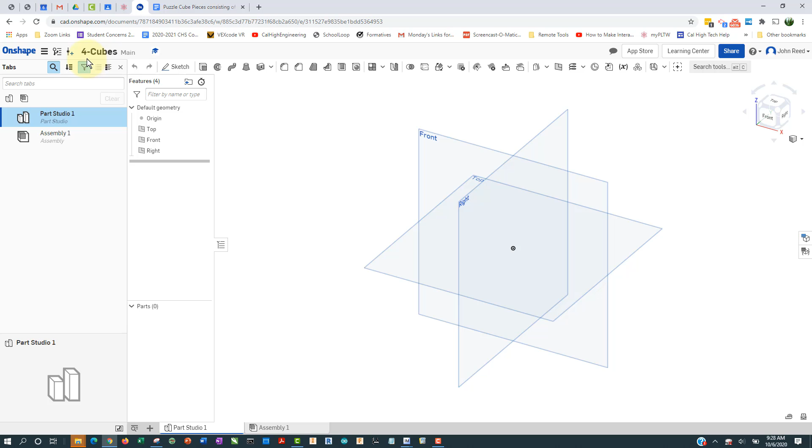Let's make sure that the workspace units are millimeters, and they are. Okay, good. Place a sketch on the front plane, and I can right click, view normal to sketch plane. That's the same thing as hitting the N key on the keyboard. So I'm going to grab the rectangle tool.

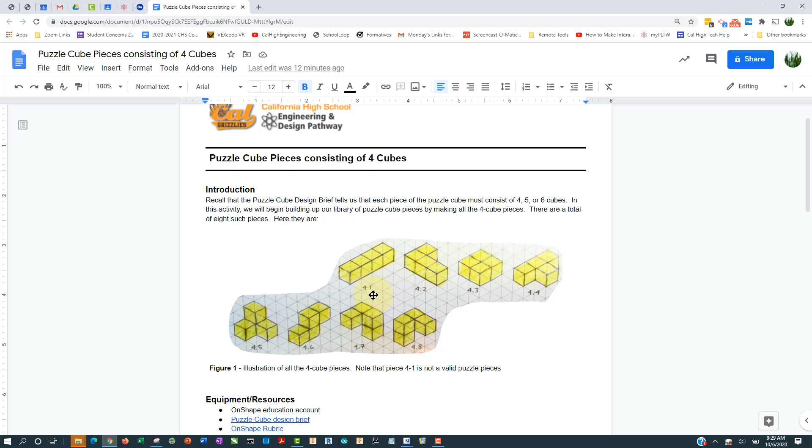But first let's take a look at what we're going to make, and it's going to be this 4-1. This is not a valid puzzle piece. In spite of that, let's just make all 8 of these. There are only a total of 8 pieces that have 4 cubes, so let's go ahead and make 4-1.

So I'm going to come here and click up here and dimension it as I go. 25 millimeters there, 25 millimeters there.

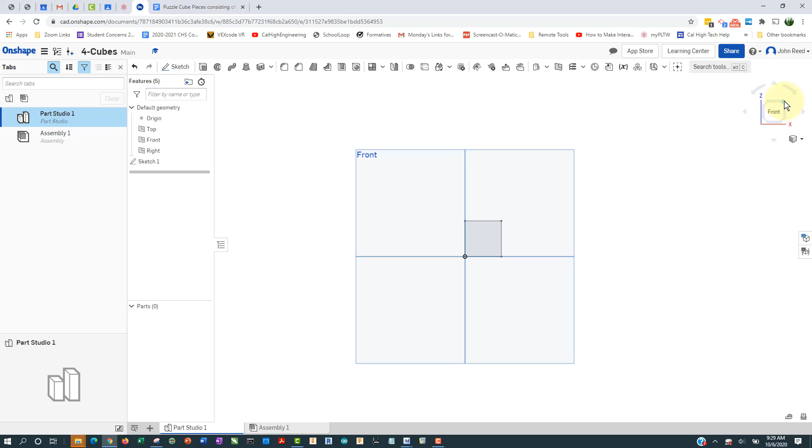I can finish the sketch, and I can hit Shift 7 or click this little corner up here of the cube, or I can just hold down the right mouse button and turn it a little bit so I can kind of see the third dimension before I extrude.

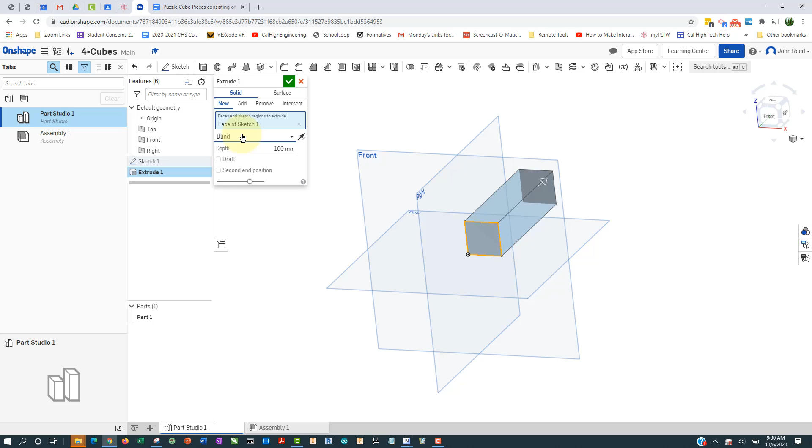And I extrude there. I'm going to go into the screen, and it's going to be a new part here. So it says blind, and the depth of that's going to be 4 times 25. So I can do math in OnShape. Symmetric up to next, yeah. So I guess the term is blind for when it just keeps going until I tell it to go to this depth. So there we have it.

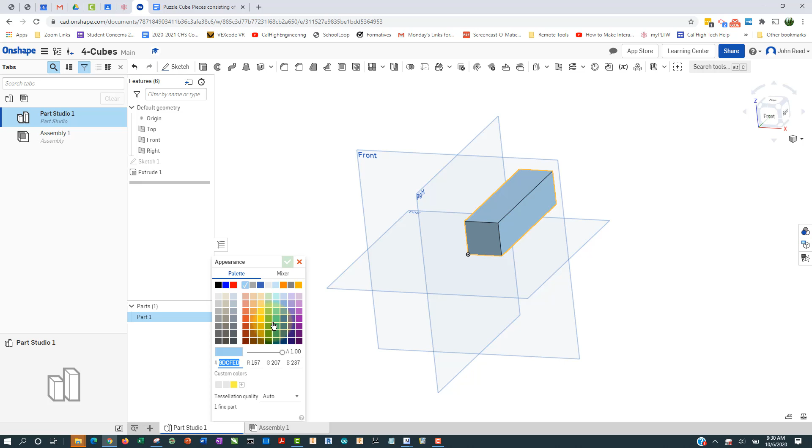So that's my part, and I'm going to make it a certain color. To do that, I can grab it like this, right click, edit appearance. Let's make it yellow. There we have it, and I can turn off the origin planes and then look at it in an isometric view, and there it is.

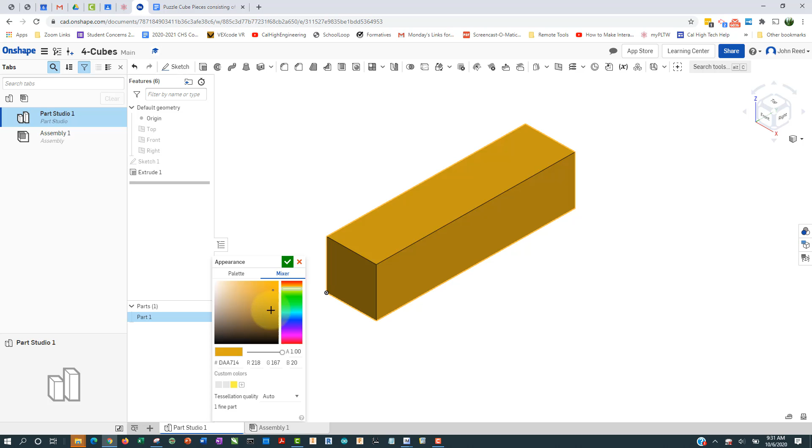Let's actually make this a little more yellow. That's tan. Edit appearance. I wanted to make it similar to what is on the paper, and I guess there's no easy yellow in there. Usually there's one up here. Oh, whatever, I'll just leave it this color.

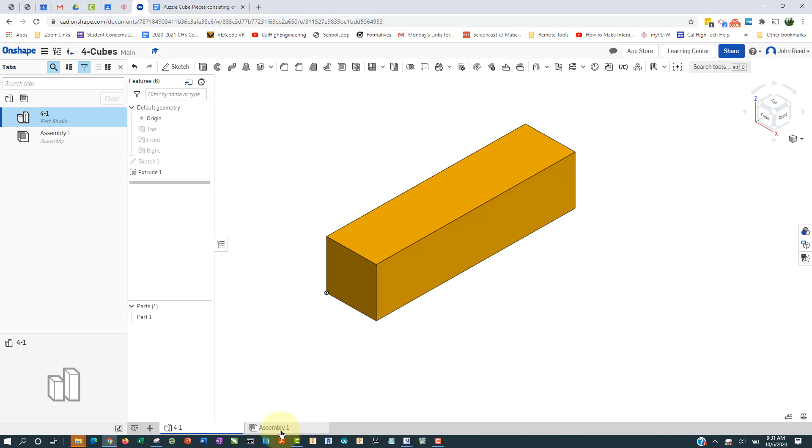There we go, and so that is part 4-1. So I'll come here, I'll rename the part studio. I believe we're told to call this 4-1. Let's check. Yeah, so part studio name is 4-1. So it says it there, and it kind of repeats here, 4-1. And of course I need to rename the part itself 4-1. I have to do those 2 rename steps, and we're finished with the first part.